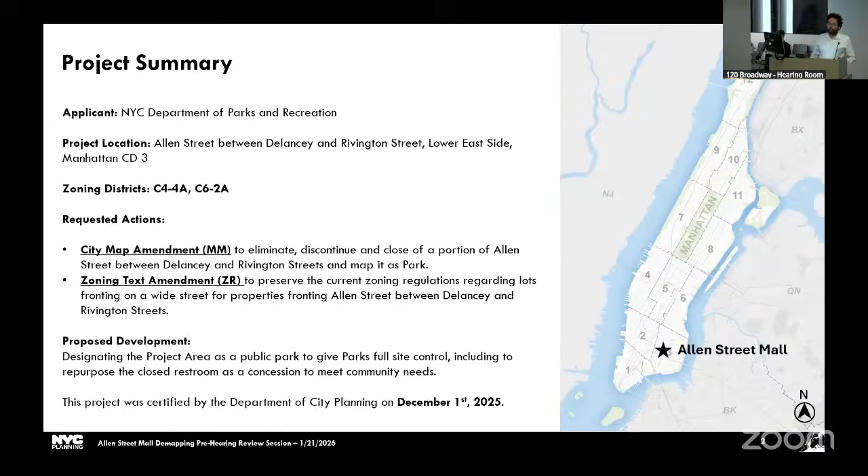The proposed text amendment would allow Allen Street to continue to be considered a wide street for zoning purposes, rather than two parallel narrow streets separated by a park.

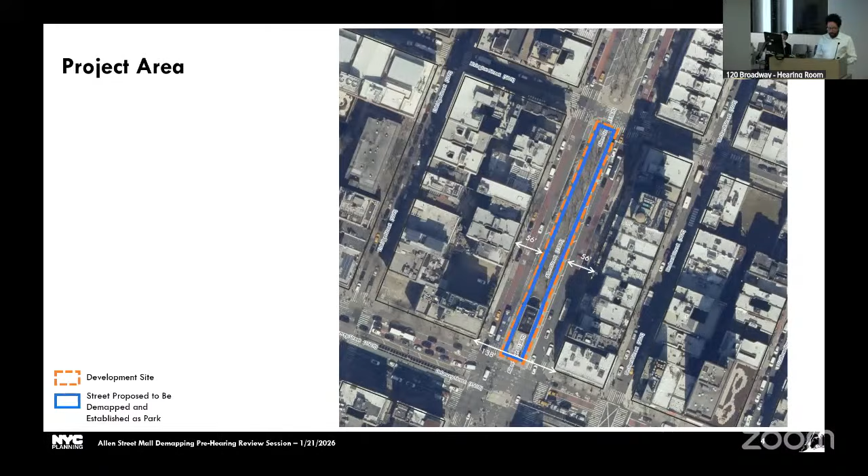So in summary, the Department of Parks and Recreation is seeking a city map amendment to eliminate, discontinue, and close a portion of Allen Street between Delancey and Rivington Streets and map it as Park, and also a zoning text amendment to preserve the current zoning regulations regarding lots fronting a wide street for properties fronting Allen Street between Delancey and Rivington Street. This is in service of designating the project area as a public park to give Parks full site control, including to repurpose the closed restroom as a concession to meet community needs.

Moving into public review, on December 11, 2025, Manhattan Community Board 3 held a public hearing on this project. Then on December 18th, the board issued a favorable recommendation for both actions with 34 in favor, 0 against, and 0 abstaining. Then on January 16th, 2026, the Manhattan Borough President also issued a favorable recommendation for both actions.

So I would like to quickly take a moment to follow up on some of the discussions that happened back at certification. First, there were some questions about bulk regulations. Absent the proposed text amendment, the required minimum setback from the street would increase from the current 10-foot requirement for wide streets to 15 feet for narrow streets.

This would make one lot non-compliant, which is the one highlighted in red. Most of the lots along this corridor appear to be fully built out, but there are 3 lots on the west side of Allen Street that have relatively low FARs built out now, which are the ones highlighted in blue.

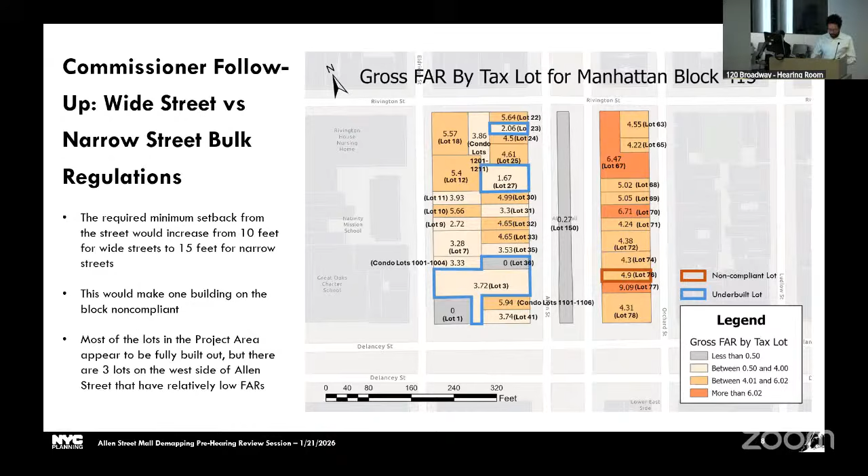Also a note about operational jurisdiction. Parks maintains the malls pursuant to interagency agreement with DOT for all the blocks within the Allen Street Mall. The reason demapping is being sought for this particular block is so that Parks can clarify their authority to administer a concession within that building. It's the one block that has a building on it.

So that's the presentation. Happy to take any questions.

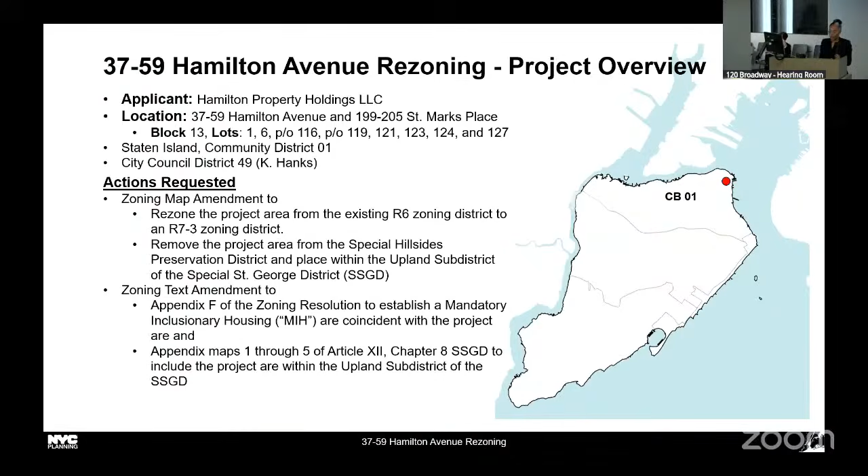These actions are proposed to facilitate the development of an approximately 324,000 square foot, 18-story mixed-use building containing 369 dwelling units, 111 of which would be income restricted, 1,250 square feet of commercial, 7,700 square feet of community use, 3,880 square feet of open space, and 146 parking spaces at 3759 Hamilton Avenue in the St. George neighborhood, Staten Island Community District 1.

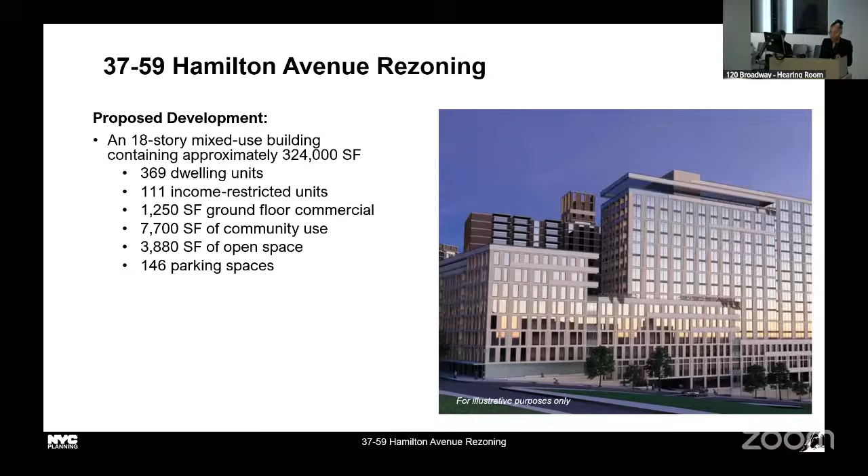This applicant is seeking a zoning map amendment. The project area consists of contiguous lots 1, 6, partial lot 119, 121, 123, 124, and 127 on Staten Island Block 13, which are all under the applicant's ownership and will be demolished for the construction of this project.

In 2021, portions of tax lots 116 and 119 within the development site were removed from the Special Hillsides Preservation District and remapped as part of the Special St. George District, and upzoned from an R6 district with a partial C2-2 overlay to an R7-3 with a C2-4 overlay.

This application was certified by the Commission on November 3rd, 2025, and on December 9th, 2025, the community board voted and issued an unfavorable recommendation. On January 8th, the Staten Island Borough President also issued an unfavorable recommendation, citing concerns that the development would not provide adequate parking and that the scale would further tax an already burdened infrastructure. That concludes my presentation, and I'd be happy to take any questions the Commission may have.

Great, thank you. Another example of a public hearing that is pending, but let's see if there are questions. Commissioner Osorio, thank you Chair. Thanks so much for the presentation. I wanted to ask, can you help us understand what else the department knows in terms of the community concerns?

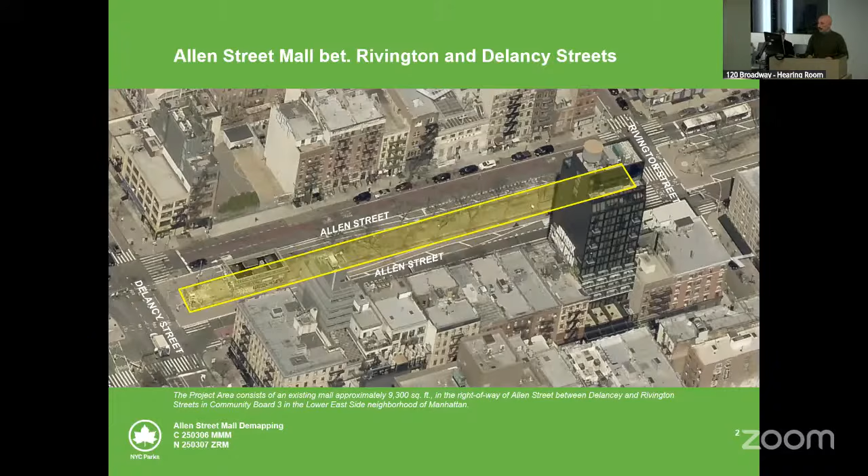As a restroom and some other sort of public amenity. The just-over-1,000-square-foot restroom facility was built in the 1930s by the borough president. It was then transferred to the Parks Department for our maintenance responsibility, just as the other malls on Allen Street were. We had tried once before to discuss this with City DOT regarding activating this site and what that would entail, since it is within their jurisdiction.

It was concluded between both our agencies that the best result for this would be to just demap this and create it as public parkland, so that only the Parks Department and our concession rules would apply for this building and for whatever operation would occupy it.

So the two actions before you are, again, the demapping of Allen Street between Rivington and Delancey. It was decided by DOT and Parks that the best result, in order to have a concession, would be to demap this and map it as parkland. The other action is to specifically designate Allen Street between Delancey and Rivington as a wide street, because after mapping it as parkland, the mall will bifurcate the north and southbound lanes into two narrow streets. This does not affect any of the buildings on that block; we're asking for the definition to be changed to a wide street for this particular block.

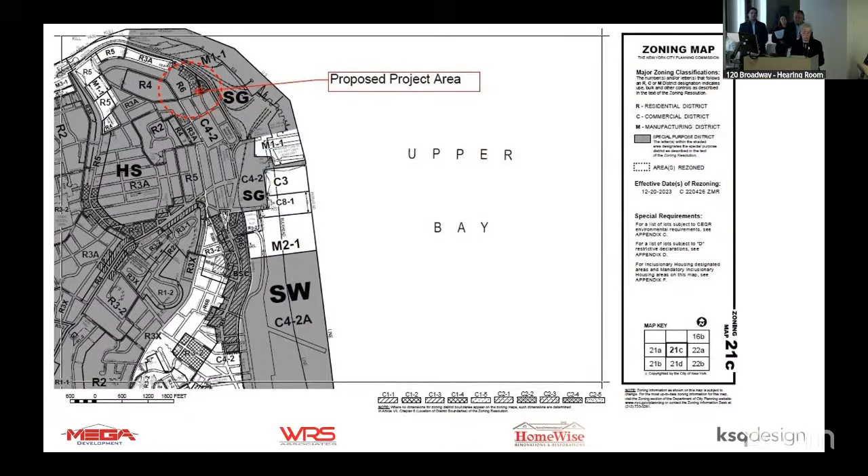Chair Garodnick and Commissioners, good morning. I'm Deirdre Carson of Greenberg Traurig, representing the applicant. I'll present the land use actions we're requesting for the project and the context in which they're proposed. The proposed project is located in Staten Island on the north side of Hamilton Avenue between Stuyvesant Place and St. Mark's Place, in an R6 district within the Special Hillsides Preservation District. The zoning lot has an area of slightly over 53,000 square feet. The applicant seeks 4 actions.

The first is a rezoning of most of the zoning lot from R6 to R7-3 with a small C2-4 overlay. Note that the easternmost part of the site is already rezoned—that was done in 2021. We also seek to remove the property from the Special Hillside Preservation District and place it in the adjacent Special St. George District; amend the St. George text to revise the map of the Upland Subdistrict to include the site; and map an extension of the Staten Island Area 5 MIH District to include our site. The physical context of this is shown in the map here.

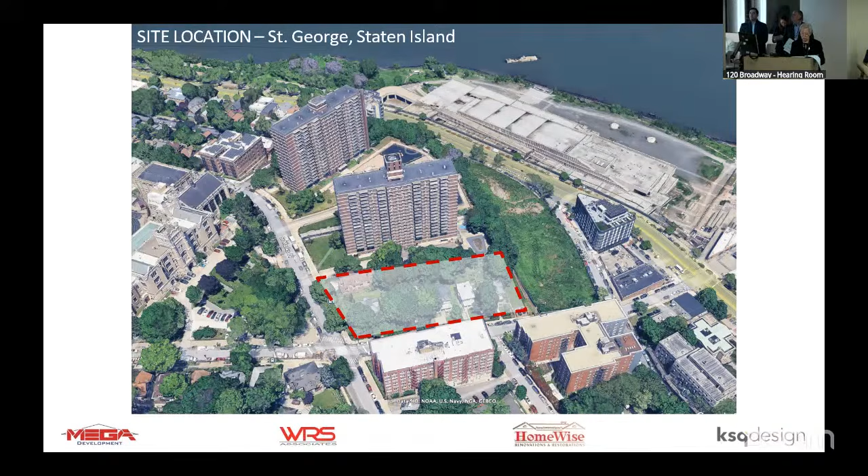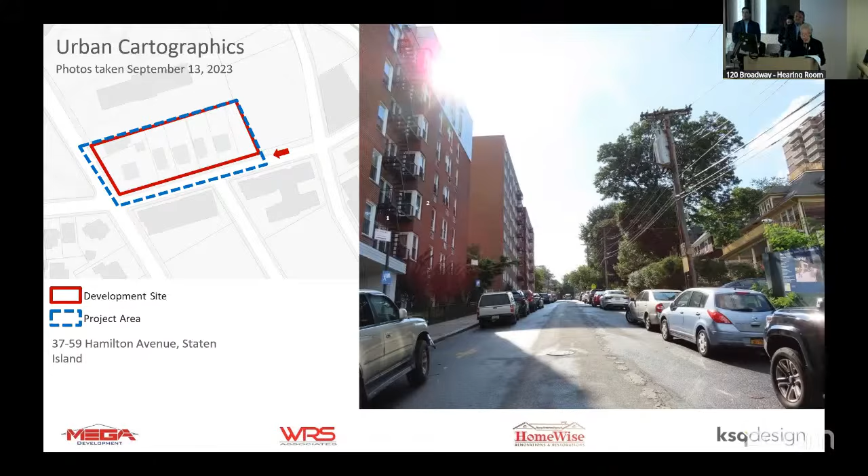The site is highly transit-oriented. Two bus lines stop on St. Mark's Place outside the project's proposed front door. Numerous bus lines run along Richmond Terrace with stops a block from the foot of Hamilton Avenue. These lines lead to and from the St. George Ferry Terminal, as well as the termini of the Staten Island Railway and many of the bus lines that serve the island. The applicant is proposing a new mixed-use building containing up to 369 housing units, retail and community facility use.

146 parking spaces, and a publicly accessible open space. The architect, Armand Quadrini, will now tell you more about the proposed building.

Good morning. I'm Armand Quadrini, Managing Partner at KSQ Architects. As Ms. Carson mentioned, my portion will discuss the building design with specific focus on the deployment of the bulk and the development of the exterior architectural character.

Moving to the site plan, there are purposely various numbers of stories in the proposed development, including 3, 6, 8, 16, and 18-story elements. We purposefully set the street walls back from St. Mark's and Hamilton Avenue as much as possible, so 23 feet offset for St. Mark's and 18 feet 7 inches on Hamilton Avenue. The strategy here is to make as generous as possible walking corridors for safety and also for planting, so we have landscape on both flanks of the building. The 16-story piece is right about in the center of the site. It's 43 feet 10 inches offset from the curb edge of Hamilton, and the 18-story piece is 60 feet set back.

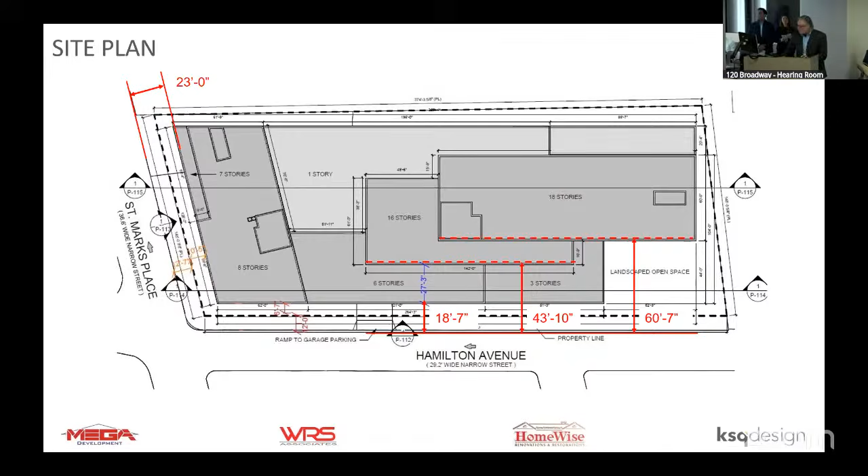The strategy for the deployment of the bulk is very simple. It's to put the highest elements of the proposed development, the 16 and 18-story pieces, adjacent to Castleton Park and to River North, and then the lower scale pieces along St. Mark's and Hamilton.

I'm going to move now to talk about the development of the exterior architectural character. Consistent with our history of work with both Mega and Billy Stein, we really work hard to study the existing architectural language in the neighborhood to make a building that's materiality is very contextual. We went to the Curtis High School, a landmark building. The predominant characteristics of the materiality include buff and sand-colored brick in a blended capacity. There's a lot of patina color green metal, as well as sandstone, or in our case, we'll do a cast stone to bring that forward. So in the proposed development, these are the colors and textures that we borrowed from Curtis. Again, our building will be very modern in its look and feel, but the materiality we think is really important to have it blend with this landmark building that's directly across the street from us.

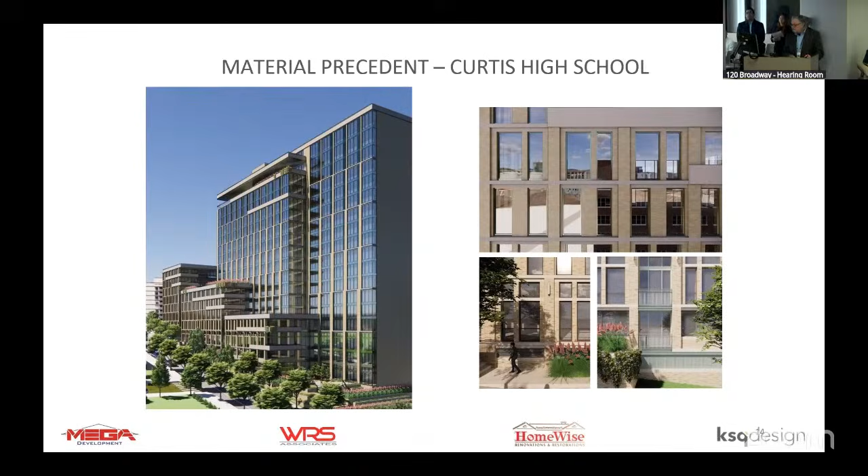You're seeing again the blend of the buff and sand color brick, a strong horizontal datum along St. Mark's. This denotes the community facility use there, and also puts a lid on the pedestrian experience along St. Mark's.

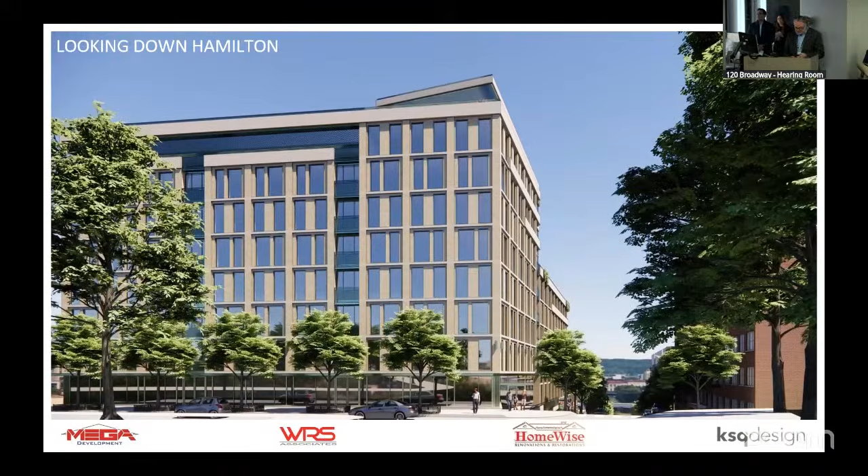Moving down, still at the top of Hamilton, is one of the main entrances to the residential development. You see the angle peels off underneath the street wall and gets access to the main amenity spaces and the front door.

A single access point for the parking garage is very deliberate. This improves safety, so we only have vehicles crossing Hamilton in one location, and we worked hard to make sure we're announcing that crossing.

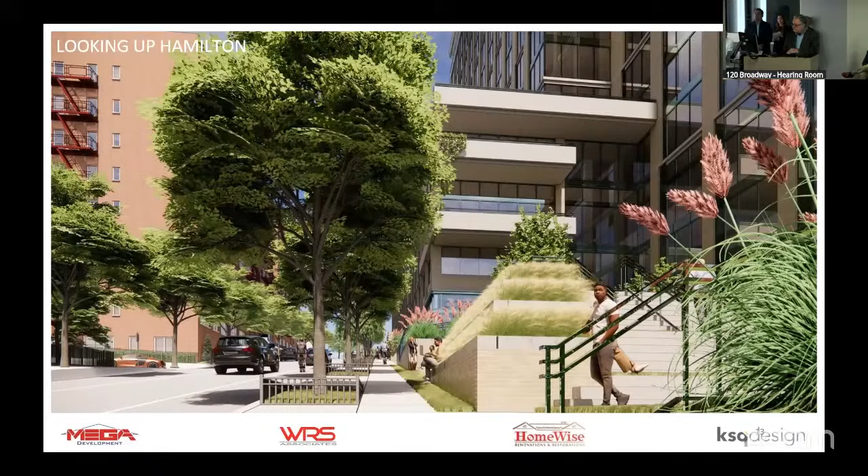I'm super proud of the public open space proposed at the bottom of Hamilton. We think of this as a second entrance to the development for our residents. So if you're in a wheelchair, if you have a stroller, etc., you would be able to come down and exit almost to the bottom of Hamilton near Stuyvesant.

This open public space makes a gesture to River North. We hope they'll have a reciprocal open space, really a true community asset for contemplative and active outdoor space. This has ADA access along Hamilton, again making that connectivity with River North.

Thank you so much. I'm going to turn it over to Mr. Kokonakis.

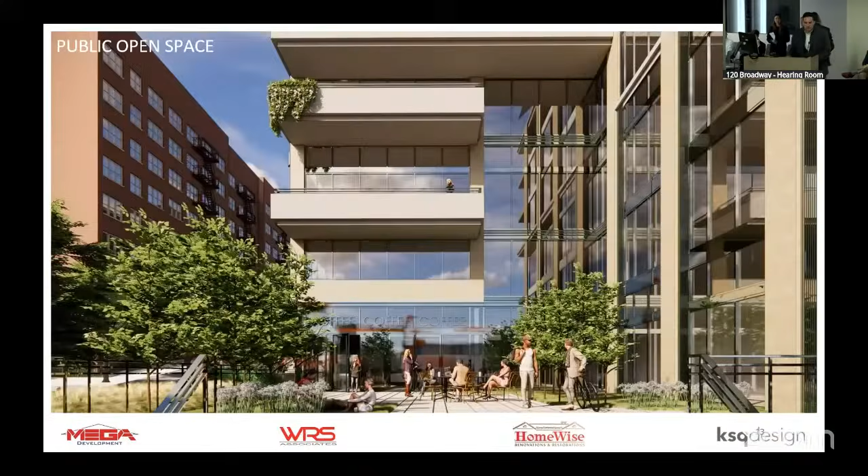Good morning, Chair and Commissioners. Emmanuel Kokonakis with Mega. I'm going to talk through some more programming and economic development aspects of the project here.

To recap quickly, 369 units. We're looking at 111 permanently affordable housing units, under option 2 from an MIH perspective at 30% at 80% AMI. We're going to have some retail and community facility space as well that we look to program with complementary community uses, as well as the open space and the parking.

Here's a quick description of our unit mix. As we previously mentioned throughout, we view this as a highly transit-oriented development, within a 10-minute walk from the Staten Island Ferry. With the expanded services coming online, we're truly excited about the transit-oriented aspects of this development.

So we have a nod to studios and one-bedrooms that we think will complement the transit-orientedness of the project, but also a good number of 2-bedroom and 3-bedroom units, 10% 3-bedrooms to complement growing family needs.

We're going to look to develop this as a Class A type product, highly amenitized, to be competitive with other waterfront communities. We view on-site cafe and working space as a critical component of any new development, as well as both active and passive uses, and capabilities for food delivery in this new age of Amazon and Fresh Direct and the like, as we look for the local community to expand its community services with supermarkets and whatnot as time develops.

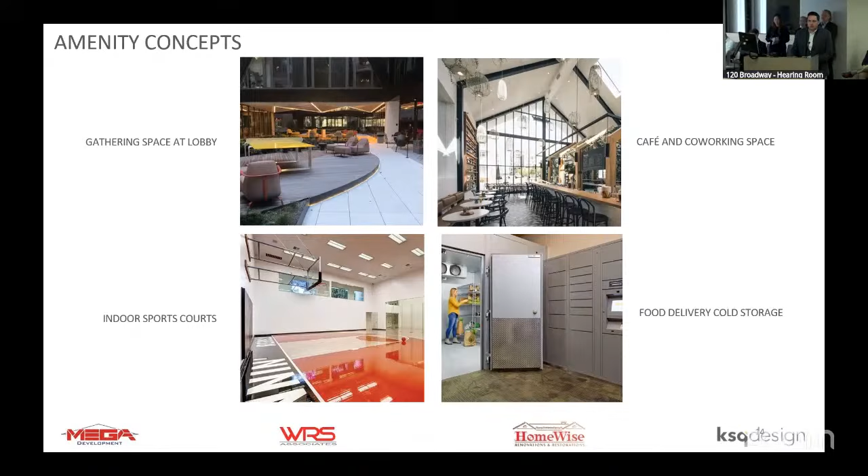We're going to try to achieve as close to carbon neutrality as we can with the project. We are going to be fully electric with no gas on site. We're going to be exploring geothermal feasibility here as well. The rock profile is actually relatively high for this site, which hopefully will be conducive for a nice geothermal system.

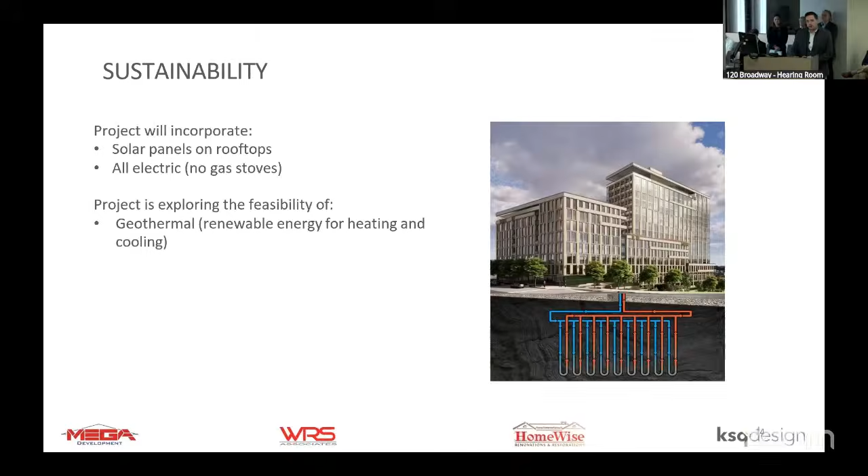Quickly touching on economic development, Mega has a long history and track record of working with HPD on a lot of affordable housing projects, and we're thoroughly well-versed in local recruiting and hiring through Hire NYC, as well as meeting and exceeding MWBE goals on all our projects. Time. Thank you.

That was well done, I must say. Okay, thank you very much for that. Let me see what questions we have.

We're going to start with Commissioner Gold and Commissioner Cerullo.

Hi, thank you. So a couple of questions. First, I'm trying to picture this and know the area pretty well. Are we at the bottom of the hill, or in the middle of that steep hill coming down towards Stuyvesant? Is that the location? So it's right at that corner? We're along the hills. So the precinct is, I'm trying to think, to our east, yes. Is Richmond Terrace right to the east?

Okay, so I guess one of the issues that the community board raised, and I'd say to you is very valid, is they're concerned about infrastructure. But also I think one of the issues with the area, having grown up there, is the lack of supply of food stores, right?

Basics of a neighborhood, right? I'm thinking through, I don't remember there being a dry cleaner. The neighborhood is still really early.

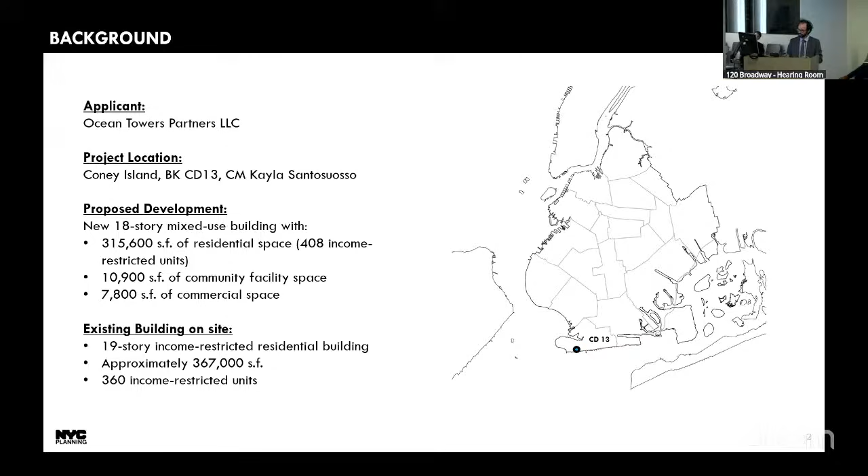The project before you is an application for a zoning map amendment, a zoning text amendment, and two special permits at 2950 West 24th Street. The applicant here is Ocean Towers Partners, LLC. The project is located in Coney Island in Brooklyn Community District 13. The council member is Kayla Santosuosso. The proposal is an 18-story building with approximately 315,600 square feet of residential space for 408 income-restricted units, 10,900 square feet of community facility space, and approximately 7,800 square feet of commercial space. There is an existing 19-story building on the site with 360 income-restricted units that will not be altered as part of this application, so the proposed building will be the second building on the site. The project also includes improvements to open space as well as alterations to the existing parking lot on the site. Here you can see the actions being requested.

The first is a zoning map amendment, which I'll describe in detail later in the presentation. Next, a zoning text amendment to map MIH options 1 and 2 over the project area. Finally, two separate special permits are being requested. The first is a special permit per ZR section 74-743 to establish a large-scale general development, or LSGD, allowing the applicant to waive regulations on height and setback, distribution of bulk, and minimum distances between walls and windows. In addition, a permit per ZR section 74-52 is required to allow the reduction of the required parking for the two buildings from 167 spaces to 143 spaces.

This is an aerial view of the surrounding neighborhood with the project area outlined in blue. The site is comprised of 1 tax lot located in Coney Island, with Seagate to the west and Brighton Beach to the east.

The project area is located just 6 blocks west of the amusement area as designated in the 2009 Coney Island rezoning plan. There are notable open spaces in the area, in addition to the beach and Riegelman Boardwalk, just 1 block south of the project. 1 block to the north is Kaiser Park, a 26-acre park with several athletic fields and courts, as well as fishing areas and public restrooms.

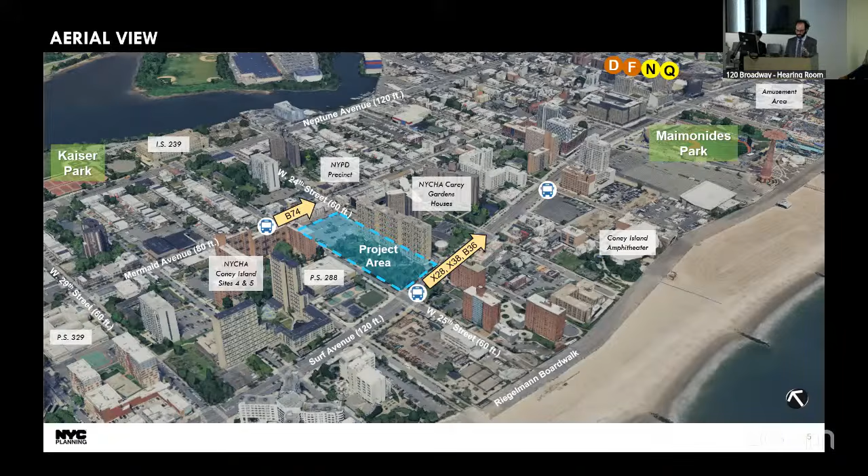Here you can see a land use map of the project area, with the project area and development site outlined in red. The project area encompasses all but the northernmost 100 feet of the subject block, which face Mermaid Avenue. You can see several community facility and institutional uses located to the east and west of the project area.

In the north, you can find a blend of tower and park-style residential developments, as well as 1- and 2-family row houses. To the north of the project area is Mermaid Avenue, an 80-foot wide street with a mix of residential uses, as well as 2- to 4-story mixed buildings with residences above lower-level retail.

The project area and development site are comprised of Lot 13 of Block 7055. The entire project area is currently zoned R6, with the northernmost portion mapped with a C1-2 commercial overlay. R6 districts permit residential uses with a maximum FAR of 2.2, or 3.9 with qualifying affordable housing. A maximum base height of 45 feet is allowed, and a maximum building height of 85 feet is permitted.

R6 zoning districts permit community facility uses at 4.8 FAR. Outside of the greater transit zone, where this project is located, parking is required for 50% of residential units and 25% of income-restricted residential units.

Within a C1-2 overlay, commercial uses are permitted below residential uses at an FAR of 2.0. R5 districts, mapped to the north and south of the project area, allow residential uses at an FAR of 1.5, or 2.0 for qualifying residential sites.

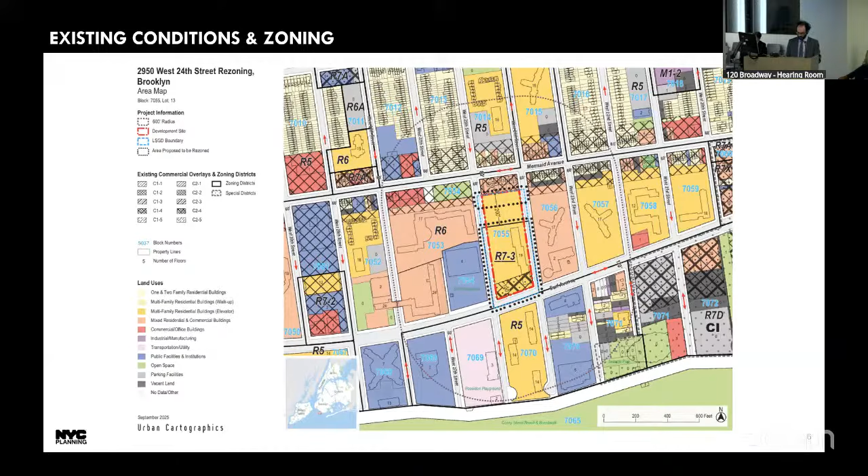Here's an aerial photo of the project area as it exists today, outlined in red. As mentioned, the project area is comprised of Block 7055, Lot 13. It was constructed in 1972 and exited the Mitchell-Lama program in 2006, but has been regulated under a new agreement with HPD since 2013.

Here you can see in blue the existing building on the lot, a 19-story residential building with 360 income-restricted units, which would not be altered as a part of this project. It contains a mix of studio to 5-bedroom units, with about 70% of units containing 2 or more bedrooms.

At the northern portion of the project area is an existing parking lot for the development, outlined in yellow, which includes 160 parking spaces, although only 117 spaces are required for the use per certificate of occupancy, and I'll touch upon that a little bit more in a bit.

Finally, you can see the general location of the proposed building and the existing open space at the top of your screen. The open space today is landscaped, but generally inaccessible, surrounded by gates.

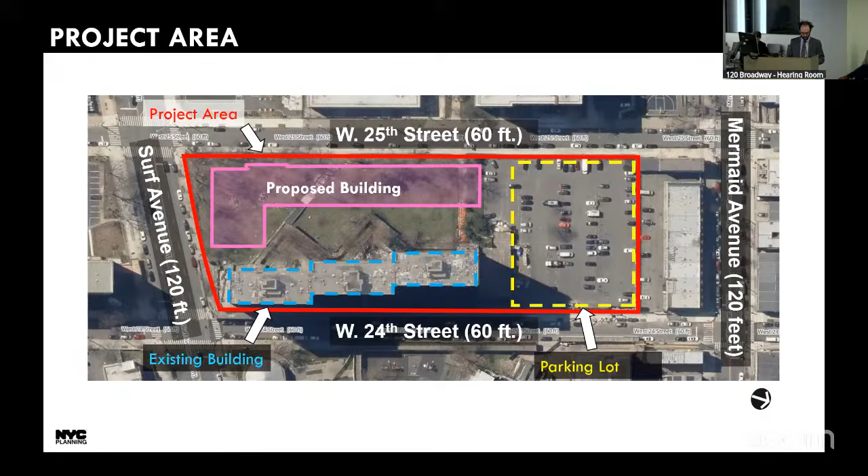I'd like to show a few images of the site as it exists today. Here you can see an image of the existing 19-story residential building on the site, facing northwest from West 24th Street. This is an image of the subject property from West 24th Street, facing southwest. In the foreground, beyond the black fence, is the existing 160-space parking lot, and at the left side of the screen is the existing 19-story building on the lot. Here's an image of the subject property from West 24th Street facing south, and you can see the existing building in the image on the right side of the screen.

This shows the project area from West 25th Street facing southeast. In the foreground here is the parking lot beyond the fence, and the existing building on the site is seen in the middle of the image. In the background to the left is Building 1 of the NYCHA Carey Gardens houses, located across West 24th Street from the project area.

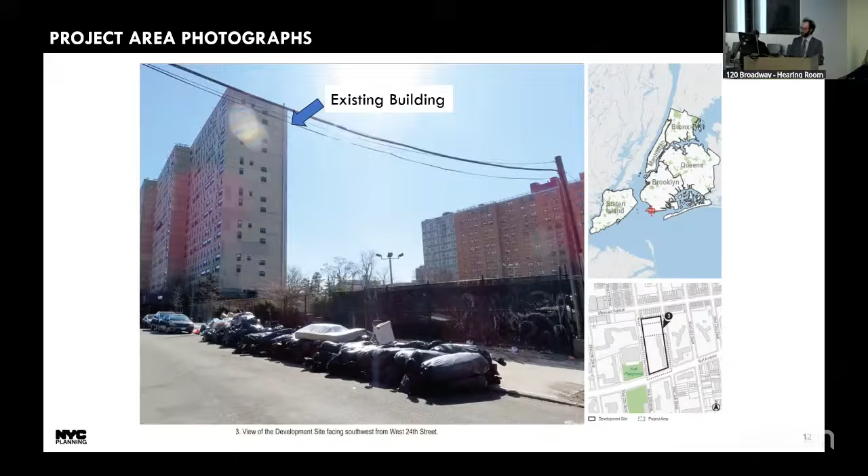This is an image of the project area facing southwest from West 24th Street. In the background is the existing building, but in the foreground is the existing open space on the site, upon which the new building is to be constructed along West 25th Street. And this is an image of the project area facing northeast from the intersection of West 25th Street and Surf Avenue. Again, the proposed building is to be located on the existing open space in the foreground of the image here.

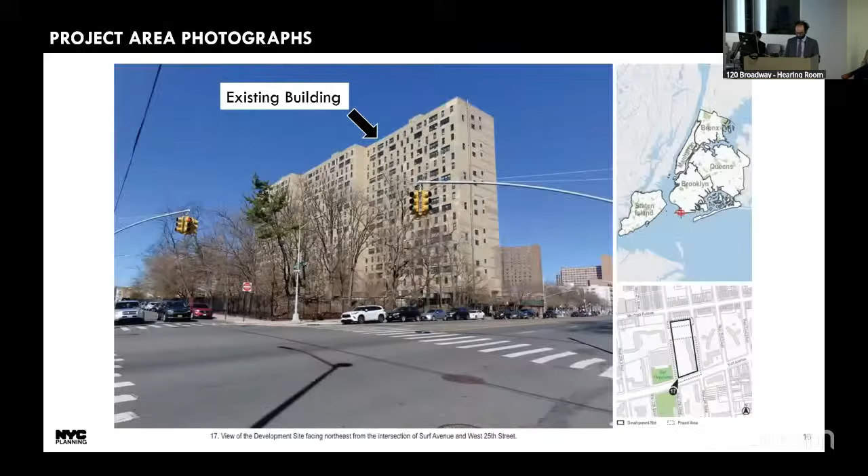The proposed development is an 18-story, approximately 334,000 square foot mixed-use building with 408 income-restricted residential units and 2 superintendent's units. The income-restricted units are to be developed pursuant to HPD's Extremely Low to Low Income Affordability Program, or ELLA. The project also includes approximately 11,000 square feet of community facility space and approximately 8,000 square feet of commercial space. As noted, the proposal will also include the reduction of the parking lot requirement from 160 spaces to 143 spaces.

If the project is approved, the full site will have 701,460 square feet of floor area with 770 total income-restricted units. This project also includes the refurbishment of many of the open spaces on the site, both internally and along the periphery of the site.

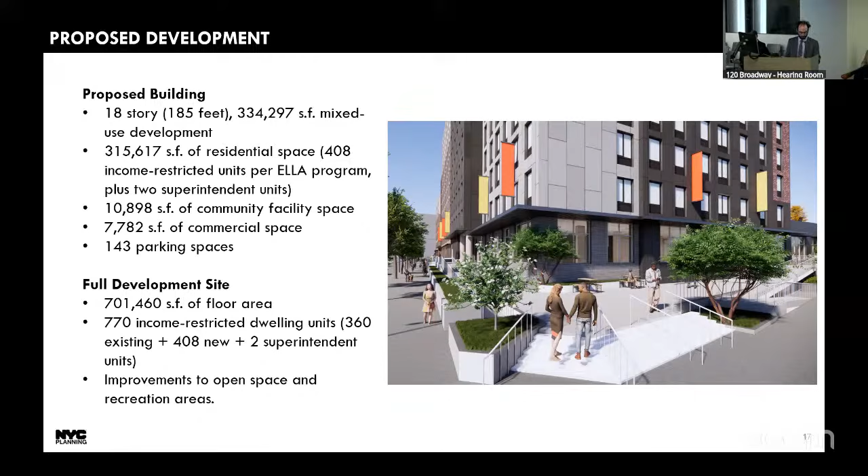As noted, the applicants are proposing several improvements to the site. Here you can see an open space plan of the existing and proposed buildings, with the proposed building at the top of the screen and the existing at the bottom. The open space between the two buildings is to include 2 playgrounds shown here in orange, as well as a series of different seating types along the walkways. A larger multi-purpose field and fitness area is to be located at the northern side of the open space between the 2 buildings.

A new entry plaza with additional greenery and ornamental trees is proposed at the intersection of Surf Avenue and West 25th Street. Along West 25th Street and Surf Avenue, at the top left corner of the screen here, additional seating and foliage are proposed to enliven and activate the street.

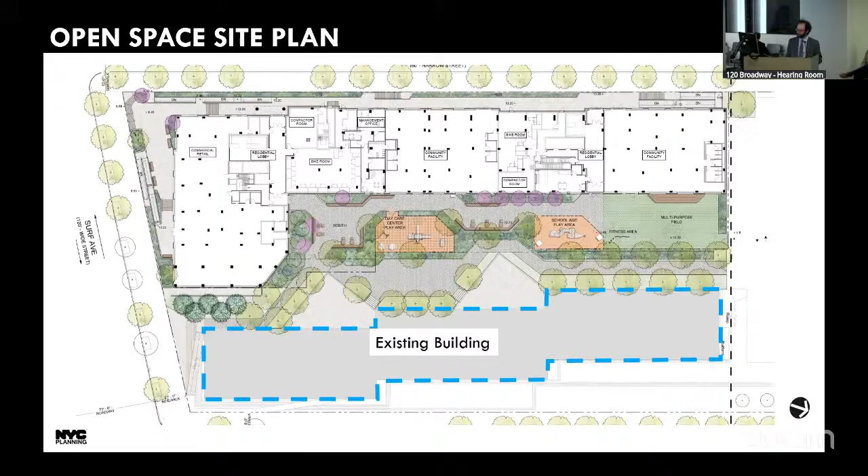As the project is located within the flood zone, I wanted to discuss the resiliency features of both the existing and proposed building, as the applicants have informed us of these elements. The existing building's lobby was flooded 4 feet during Hurricane Sandy, and as a result, management upgraded and replaced several elements, including elevators, boilers, heating pipes, and windows. In addition, 2 mechanical rooms were constructed above the flooding area.

In the proposed building, the applicant is raising the building to the design flood elevation, or DFE, which is equal to the base flood elevation plus a safety margin for future risk, adding additional protection. The basement is to be dry flood proofed. Additionally, the building is to be compliant with HPD guidelines to meet standards based on 2080 sea level rise calculations.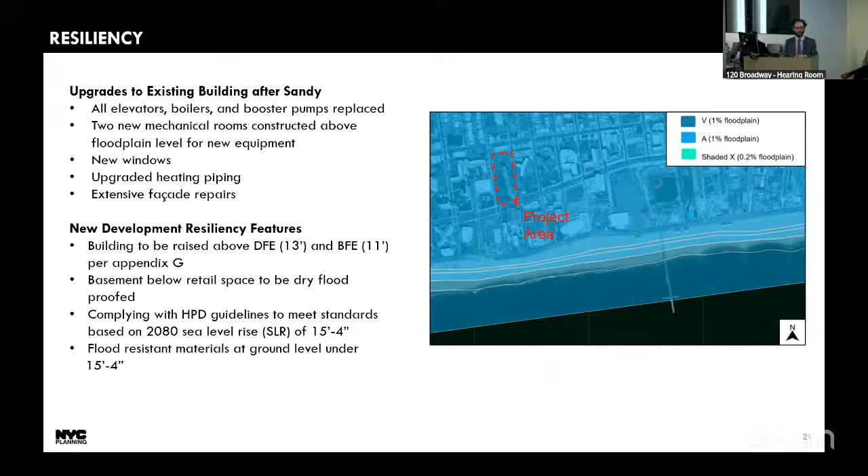As noted, 4 actions are being requested of the CPC today. The first is a zoning map amendment, which can be summarized in 3 parts. The entirety of the project area is mapped R6 right now, and a portion of that R6 district will be rezoned to R7-3. That's part 1. A C2-4 commercial overlay is to be mapped over a portion of the R7-3 district along Surf Avenue. And finally, the depth of the existing C1-2 overlay mapped along Mermaid Avenue to the north will be reduced from 150 feet to 100 feet.

Next, the applicant is requesting a zoning text amendment to map MIH options 1 and 2 over the project area. Finally, the applicant requests 2 CPC special permits. The first is a special permit to establish an LSGD, permitting the applicant to modify regulations on height and setback, distribution of bulk, and minimum distance between walls and windows. The applicant is requesting a second special permit to reduce the required parking at the site from 167 spaces to 143 spaces.

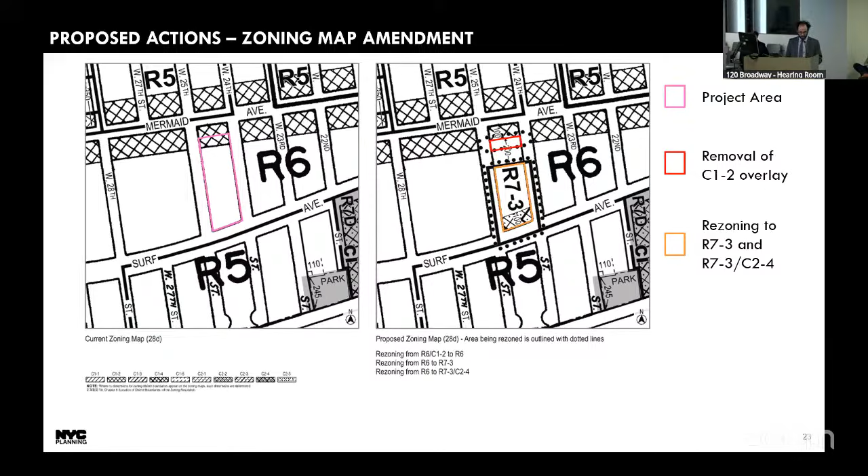Regarding parking, the project area is outside of the greater transit zone. Just as is the case with the existing R6 districts, buildings in R7-3 districts must provide parking for 50% of dwelling units. However, that requirement is only 12% for income-restricted dwelling units, and all parking may be waived if under 15 spaces are determined to be required.

The applicant also seeks to amend Appendix F of the zoning resolution to designate the project area as a mandatory inclusionary housing, or MIH, area with options 1 and 2. Option 1 requires that affordable housing be set aside at 25% of the residential floor area at an average of 60% of the area median income. Within that 25%, at least 10% at 40% AMI is required. Option 2 requires that 30% of the residential floor area of the building be affordable to households at an average of 80% AMI. While the applicant technically intends to choose option 1, ensuring approximately 102 units are permanently income restricted, they intend to exceed these minimum requirements by providing all units as income restricted per HPD's Extremely Low and Low Affordability Program, or ELLA program.

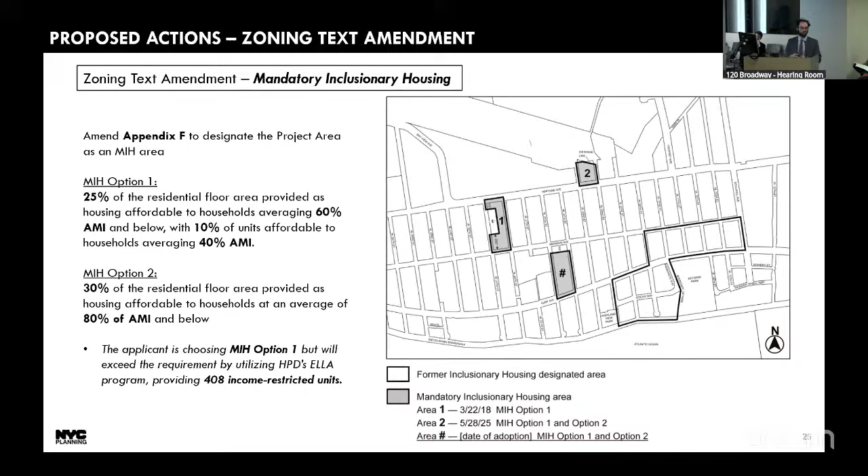2 special permits are being requested with the application. The first special permit requested is for an LSGD. The LSGD will allow the applicant to construct the building with waivers related to height and setback, distribution of bulk, and minimum distances between walls and windows. I'll elaborate upon each of these further in the next few slides.

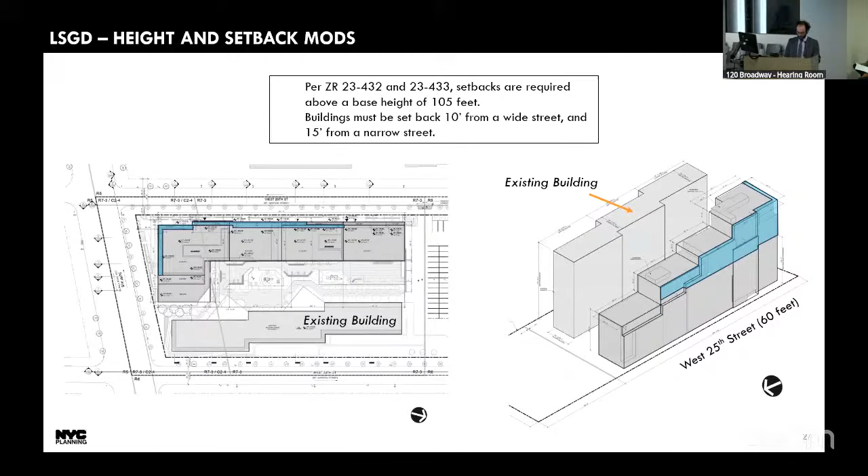Additionally, the applicant is requesting permission to redistribute residential floor area from the R6 portion of the lot to the R7-3 portion. As noted, the area of the tax lot occupied by the parking lot will remain zoned R6. So the applicant is requesting that the permitted bulk in that area, which will be unused as it's a parking lot, be transferred to the remainder of the zoning lot. The R7-3 district permits a maximum FAR of 6.0 and a maximum community facility FAR of 6.5, as previously discussed. But with this waiver, the total built FAR within the R7-3 portion of the lot is to be 7.35, and the total built FAR within the R7-3 C2-4 portion of the lot is to be 6.16.

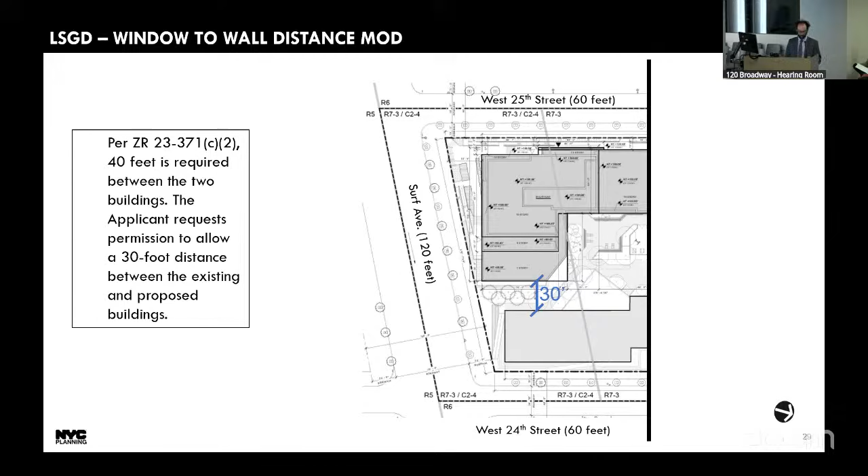An additional special permit is requested related to parking. While the site currently has 160 spaces, only 117 spaces are required per an existing certificate of occupancy. The new building would require 50 spaces. Adding those requirements together, 167 total spaces are to be required for the full development after construction. The applicant is seeking a special permit per ZR section 7452 to allow a waiver of this requirement so they can construct 143 spaces rather than the required 167. To approve the special permit request, the CPC must find that the reduction won't impede access to existing parking on adjoining lots and won't have undue adverse impacts on residences, businesses, or community facilities in the area. The CPC is permitted to prescribe appropriate conditions to minimize impacts on the character of the neighborhood.

This completes the summary of actions being requested for the project.

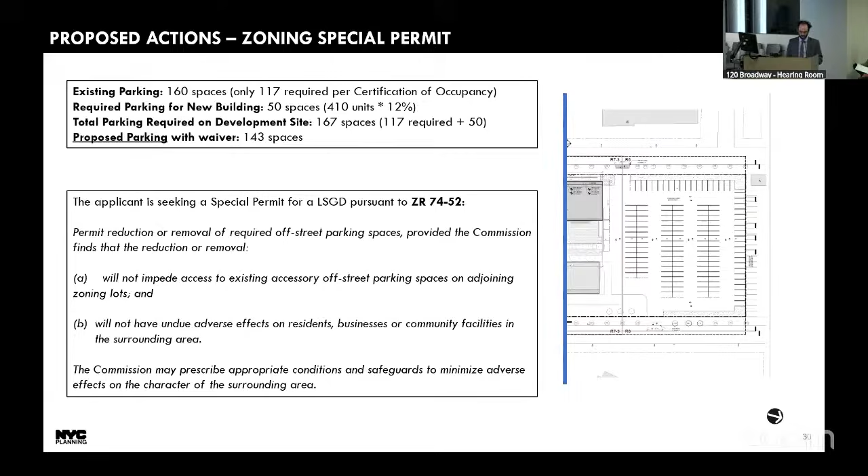This project requires a racial equity report pursuant to Local Law 78. While the area is designated as having a lower displacement risk, the annual median household income in the area is approximately $47,000, which is considerably lower than Brooklyn and New York City as a whole. The applicant has stated that the proposal would produce 408 income-restricted units from a range of 27% of AMI to 77% of AMI. Nearly 60% of units would be designated as income-restricted to individuals earning no more than 57% of AMI.

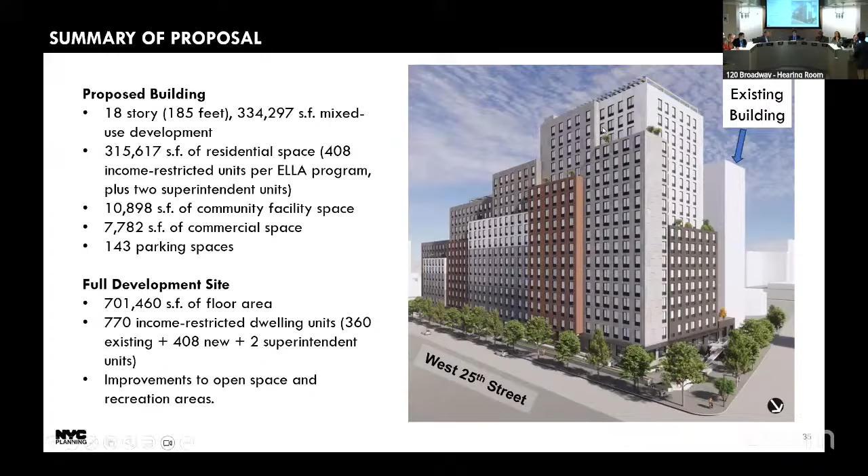Great presentation, but I was hoping to get more understanding of the relationship between the Mitchell-Lama part of the project and this new part. You suggested that the upgrades in the Mitchell-Lama part of the project had already been completed.

Correct. But I thought I read that part of the money from this project was going to fund those upgrades. Yeah, so there will be additional upgrades that the applicant has told us about, and I'll allow them to elaborate more, but our understanding is that many of the upgrades were due as a result of Hurricane Sandy years ago. However, they plan to have additional upgrades for the building that were perhaps not as urgent in terms of resiliency after Hurricane Sandy, that are to be applied after this project is completed.

Can we get a list of those? Because some of them seem to be the same as what you were talking about. It said they would be paying for upgrades to existing elevators or new elevators, boilers and booster pumps, two new mechanical rooms above the floodplain, new windows, upgrading heating pipes, and facade repairs. So I'd like a list of the ones that have already been done and the ones proposed to be funded from the sale or lease of the excess land.

Well, I do want to clarify regarding Mitchell-Lama that it's currently not regulated by Mitchell-Lama today. Right, so they're out of the Mitchell-Lama program. I understand that, but it's easier to just clarify this.

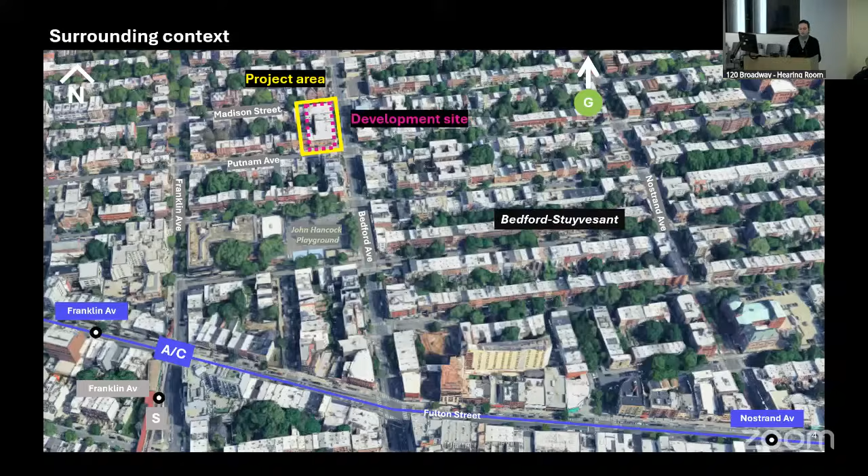The project area is currently zoned R6A C24, which allows for buildings including qualifying affordable housing to reach a maximum height of 95 feet with a maximum base height of 65 feet and a maximum residential FAR of 3.9. Parking is not required for residential uses in the inner transit zone and is waived for non-residential uses when located in mixed buildings. The commercial overlay allows for local retail.

This project area's R6A zoning was established as part of the 2007 Bedford-Stuyvesant rezoning. That rezoning aimed to preserve neighborhood character while also supporting housing growth and affordable housing along appropriate corridors such as Fulton Street, which was mapped within an R7D district as part of that rezoning.

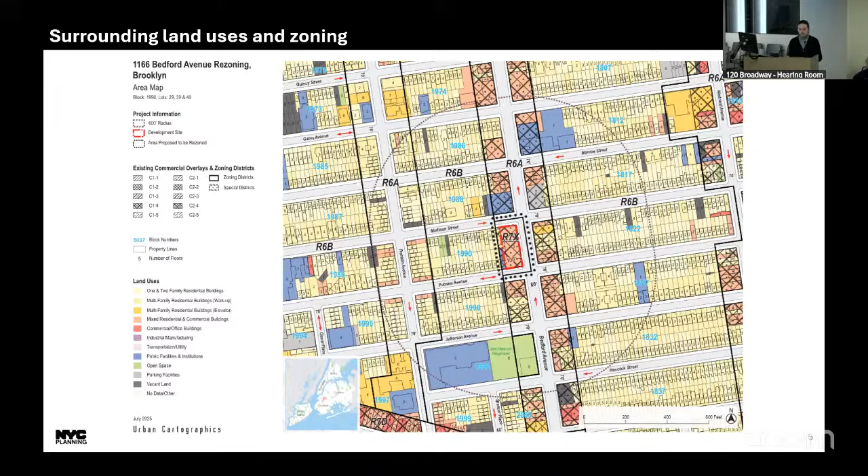The building's 2nd and 3rd floor and a part of the 1st floor are dedicated to the Masjid Abdul Muhsi Khalifah and the Clara Muhammed School of Masjid Khalifah, both of which will continue to occupy the proposed development. The rest of the 1st floor has neighborhood commercial uses, including restaurants, office space, and a home improvement store.

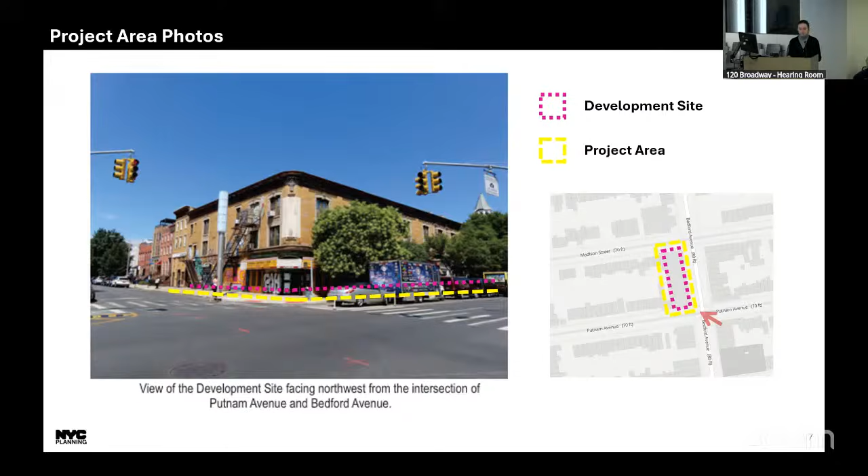The applicant is proposing a 12-story, 93,837 square foot building. This would include 75,602 square feet of residential, consisting of 144 units of income-restricted senior housing. This building would also include 13,412 square feet of community facility space, including the Masjid Abdul Muhsi Khalifah and the Clara Muhammed School, currently located on the development site. The remaining 4,823 square feet would be ground floor commercial space.

The building would rise to a height of 95 feet before setting back and continuing to rise to a total height of 125 feet. Along Madison Street, which is visible on the right-hand side of this rendering, the proposed development would set back after 45 feet. No off-street parking spaces would be provided.

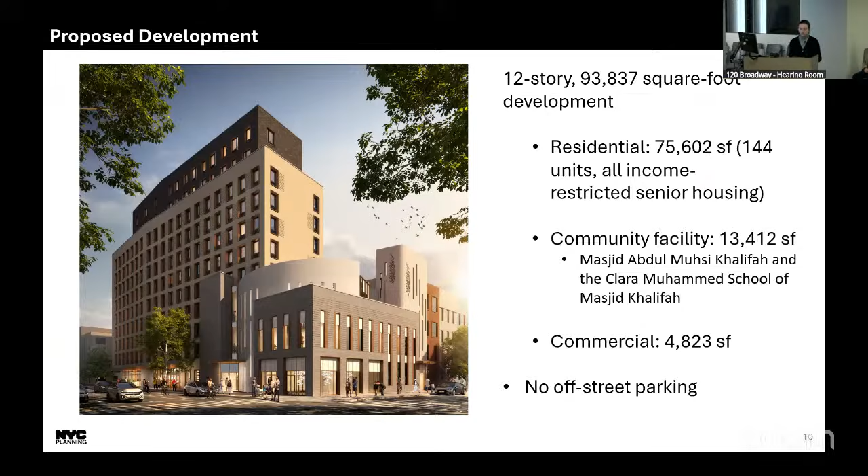To facilitate this development, the applicant is requesting a zoning map amendment to change the existing R6A C24 district along the west side of Bedford Avenue between Madison Street and Putnam Avenue to an R7X C24 district.

The proposed zoning district of R7X is a contextual medium-density residential zoning district that permits 6 FAR of residential uses for qualifying affordable housing. The maximum community facility FAR in this district is 5. The maximum height for buildings containing qualifying affordable housing in R7X districts is 145 feet, with a maximum base height of 105 feet.

The C24 commercial overlay would remain in place, continuing to allow neighborhood commercial uses like local retail and restaurants. This development site is in the inner transit zone, meaning off-street parking is not required for residential uses, and non-residential parking requirements are waived in mixed buildings.

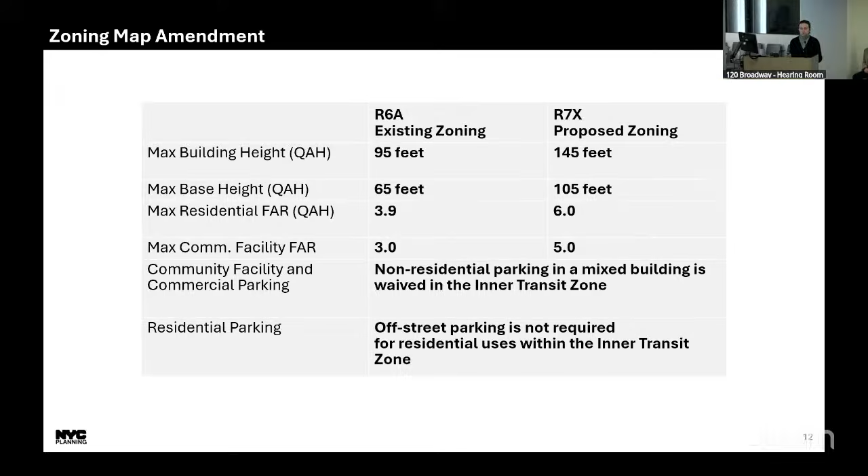In addition to the zoning map amendment, the applicant is requesting a zoning text amendment to amend Appendix F and establish an MIH area with options 1 and 2. The proposed MIH area can be seen at the top of this map.

MIH option 1 requires that 25% of residential floor area be affordable at 60% AMI. MIH option 2 requires that 30% of residential floor area be affordable at 80% AMI.

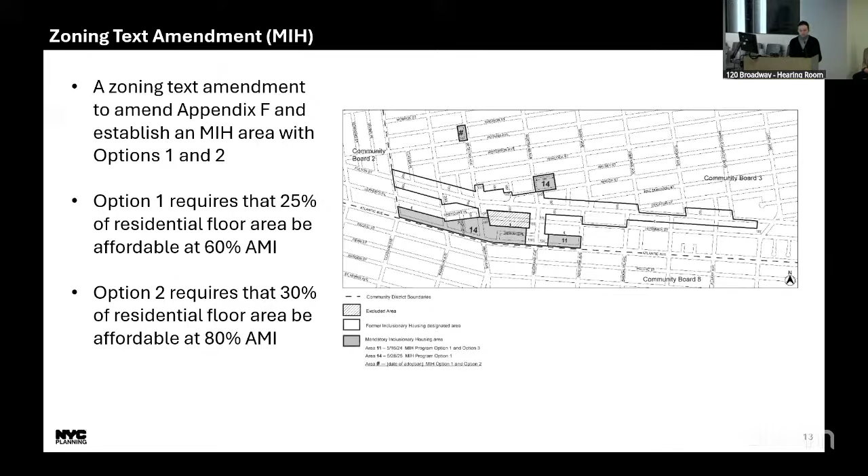So in conclusion, Khalifa Residences LLC is requesting a zoning map amendment to change an R6A C24 district to an R7X C24 district, and a zoning text amendment to establish an MIH area. These actions would facilitate a new 12-story development with 144 units of income-restricted senior housing, as well as community facility and commercial space. Thanks so much.

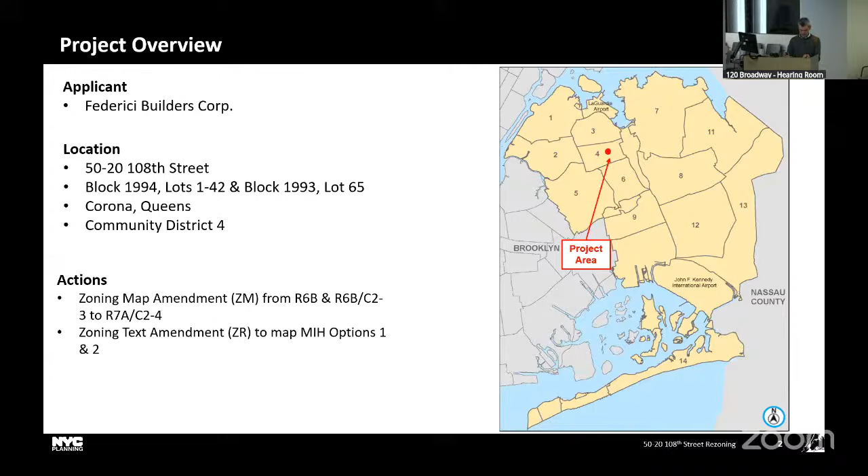These actions would facilitate the development of 2 mixed-use buildings with approximately 216,400 total square feet, containing 196 total dwelling units, of which 49 would be income restricted, 15,300 square feet of commercial space, 16,600 square feet of community facility space, and 68 total accessory parking spaces.

Here is an aerial view looking at the Corona neighborhood and surrounding areas. The project area is located between 108th Street and Corona Avenue, both wide streets. 108th Street is a major north-south corridor running to the center of Corona. The project area is located less than a half mile from Flushing Meadows, containing attractions such as the New York Hall of Science, Queens Museum, and Queens Zoo. The surrounding area is served by a number of elementary, intermediate, and high schools.

This proposal is also located within the outer transit zone. 108th Street is served by the Q23 bus, while Corona Avenue is served by the Q58. The nearest subway station is at 103rd Street Corona Plaza, along the 7 train on Roosevelt Avenue, approximately 7 or 8 blocks to the north.

As seen here, the immediate surrounding area is characterized by a mix of land uses, including residential, commercial, and community facility uses, with commercial uses concentrated along 108th Street and Corona Avenue, where commercial overlays are also mapped. The surrounding areas are primarily residential, in line with the underlying residential districts.

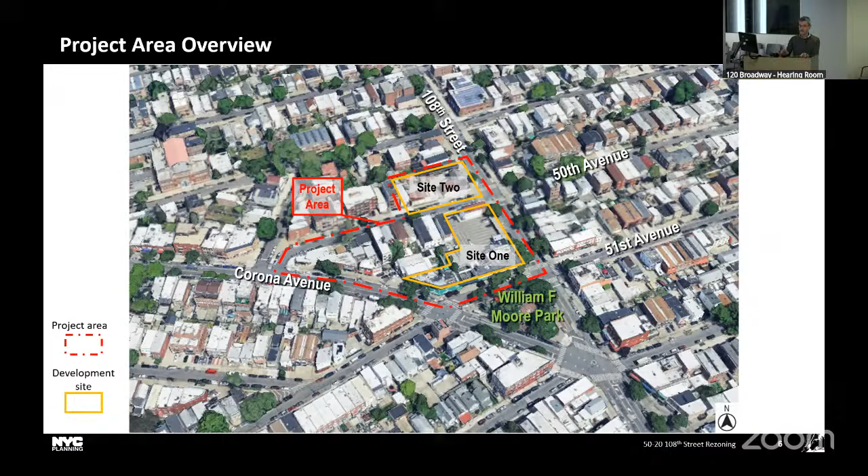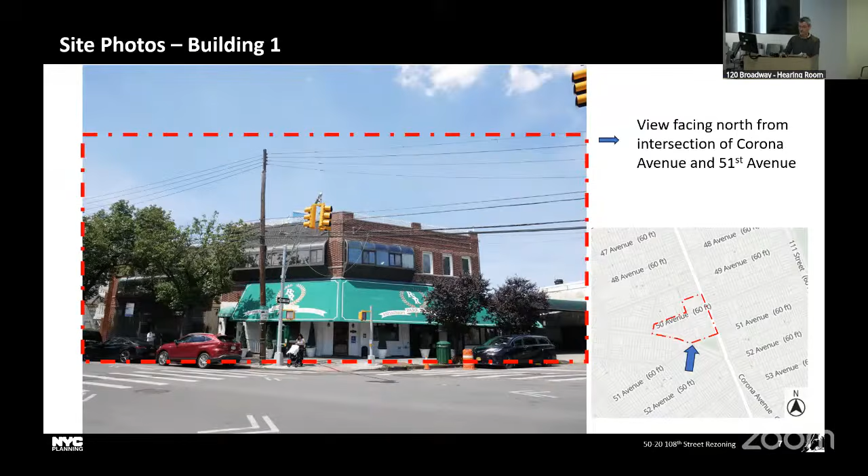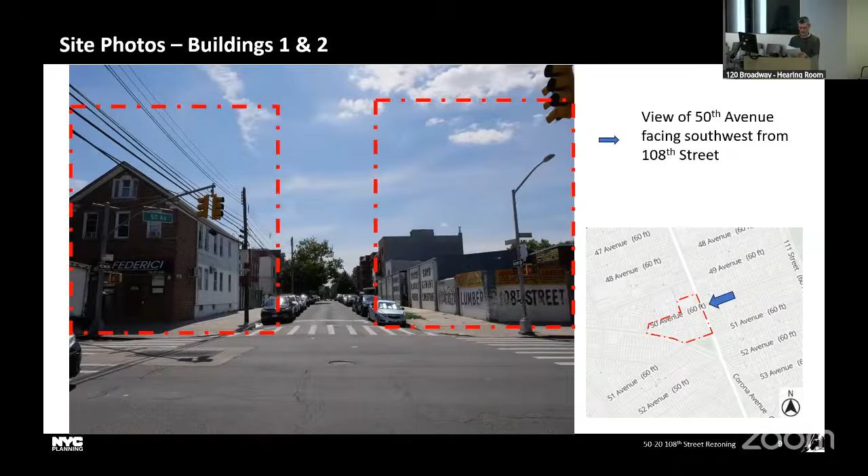The proposed rezoning would facilitate the development of 2 new buildings containing 196 total dwelling units, of which 49 would be income restricted, 15,300 square feet of commercial space, 16,600 square feet of community facility space, and 68 total accessory parking spaces.

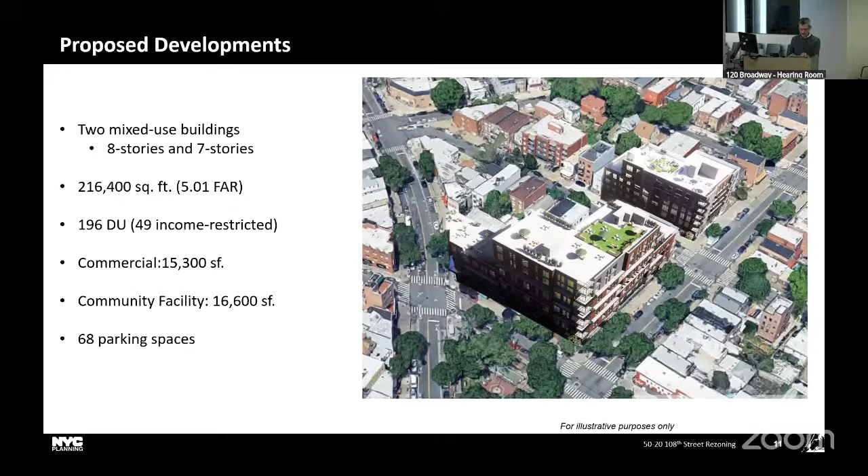Building 1 would be built at 5020 108th Street with 8 stories and a total building height of 85 feet, and would contain 141,200 total square feet out of a max FAR of 5.01. The building would contain 122 dwelling units, of which 31 would be income restricted, with 15,300 square feet of commercial space and 6,400 square feet of community facility space, and 44 accessory parking spaces situated in the cellar.

Here you can see the commercial entrance. The residential entrance would be situated along 108th Street, as well as an entrance to the community facility space. A parking entrance to the cellar would be situated along 50th Avenue, where a new curb cut would be made, and commercial entrances would be situated along 51st Avenue as well as Corona Avenue.

Building 2 would be a 7-story building with a max building height of 75 feet, containing 75,200 total square feet, with 74 dwelling units, of which 18 would be income restricted, 10,200 square feet of community facility space, and 24 accessory parking spaces.

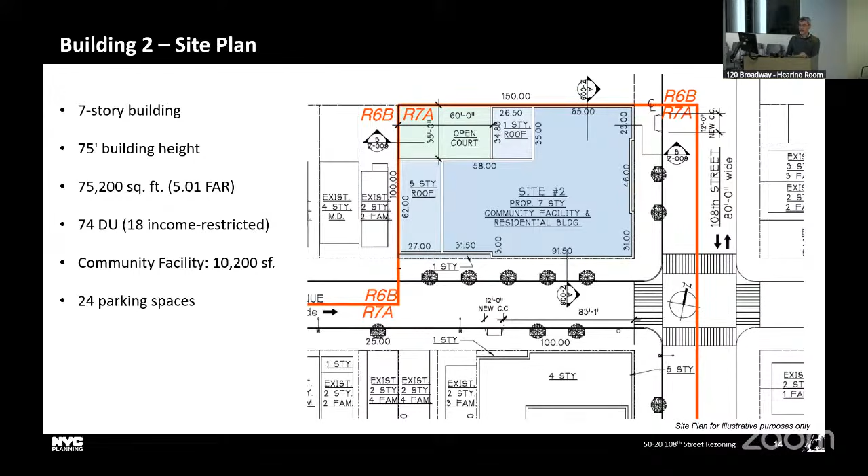Those parking spaces would also be located in the cellar, accessible via a new curb cut along 108th Street. Entrance to the residential and community facility portions of the building would also be accessible from 108th Street.

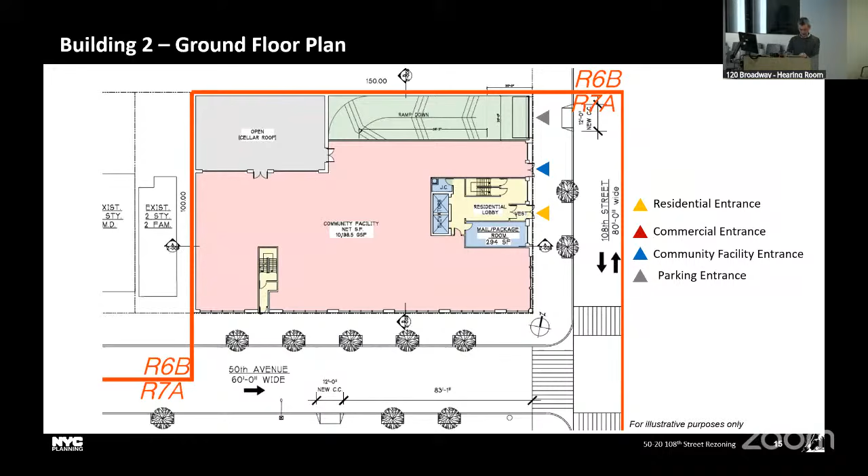So to facilitate this proposed development, the applicant proposes a zoning map amendment from existing R6B and R6B/C2-3 zoning districts to an R7A/C2-4 zoning district, and a zoning text amendment to map MIH options 1 and 2.

The applicant is also seeking to map both options 1 and 2 for mandatory inclusionary housing. Option 1 requires 25% of residential floor area be income restricted at an average of 60% AMI, while option 2 requires that 30% of residential floor area be income restricted at an average of 80% AMI. In this case, the applicant is proposing to utilize option 1 in both new buildings.

This application is subject to a racial equity report requirement since it seeks approval for an increase in permitted floor area of at least 50,000 square feet. The median household income in Community District 4 was approximately $59,400 annually, which is less than estimates for Queens and New York City at $70,900 and $67,100 respectively.

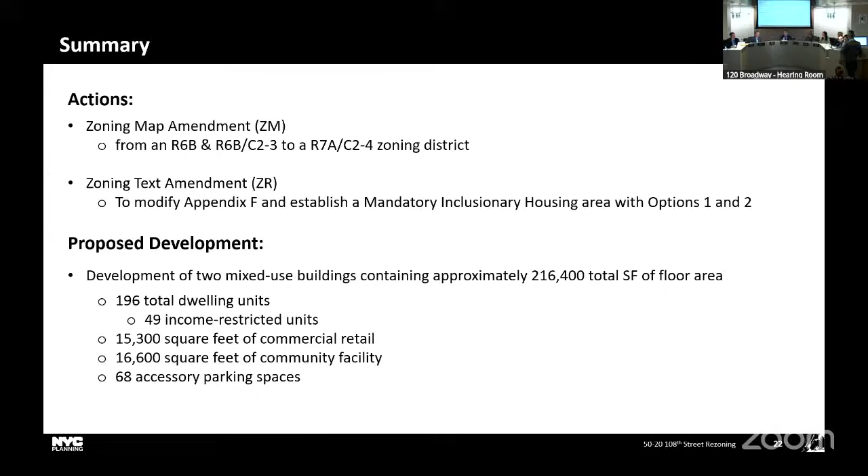Commissioner Osorio: Thank you, Chair. Thanks for the presentation. I just wanted to make a quick comment. From the racial equity report, it's also very important to highlight that this has one of the highest risks for displacement. So I would love to hear a little bit more in terms of how MIH option 1 really works out regarding the need for deeper affordability. Something I would love to hear more about when this comes back to us.

Sure, thank you for the comment. Yeah, thanks so much. Thanks, Commissioner.

Okay, well, Commissioner Osorio, sorry about that. Yes, and if you can, when we see it again, say a little bit more about what the plan is for the renovations for William F. Moore Park, that would be great. Okay, sure, thanks. Okay, thank you.

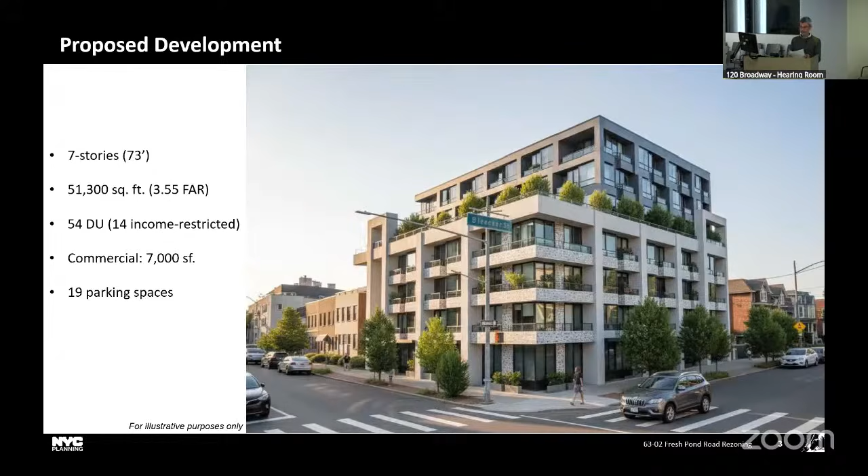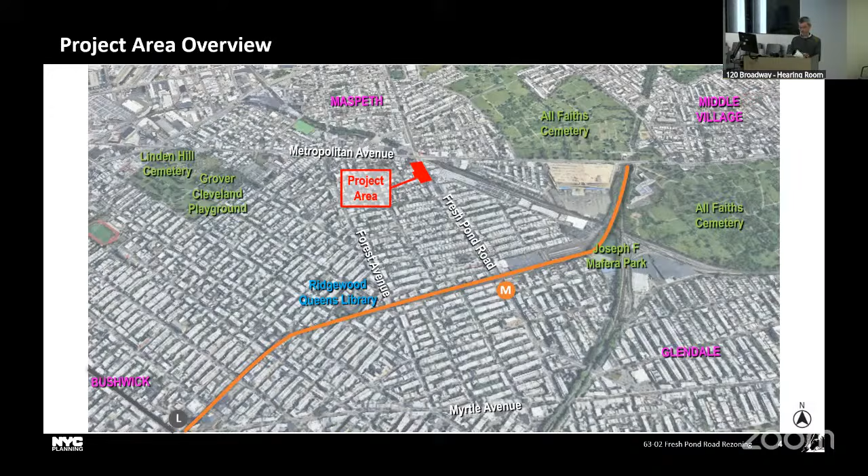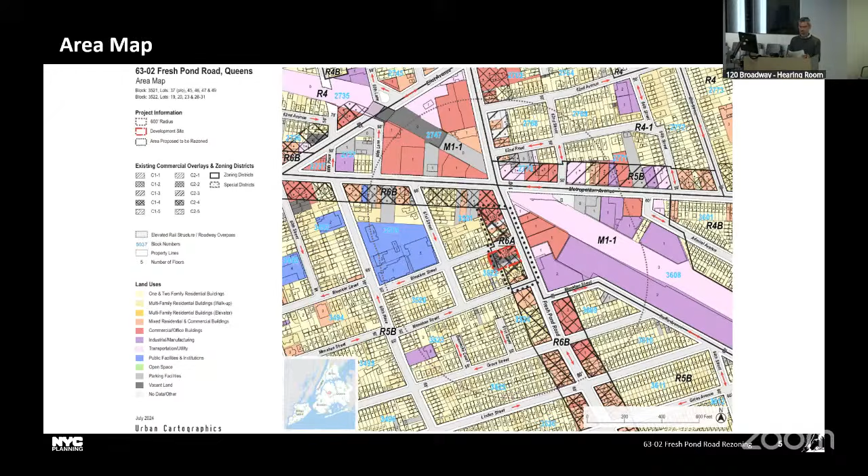Now zooming in closer to the project area, with the project area outlined in red and development site outlined in yellow, which is applicant-owned and currently a vacant lot. The non-applicant-owned lots within the project area are primarily improved with 2- and 3-story mixed-use buildings with ground floor commercial and residential uses on the upper floors, as well as a drive-through TD Bank.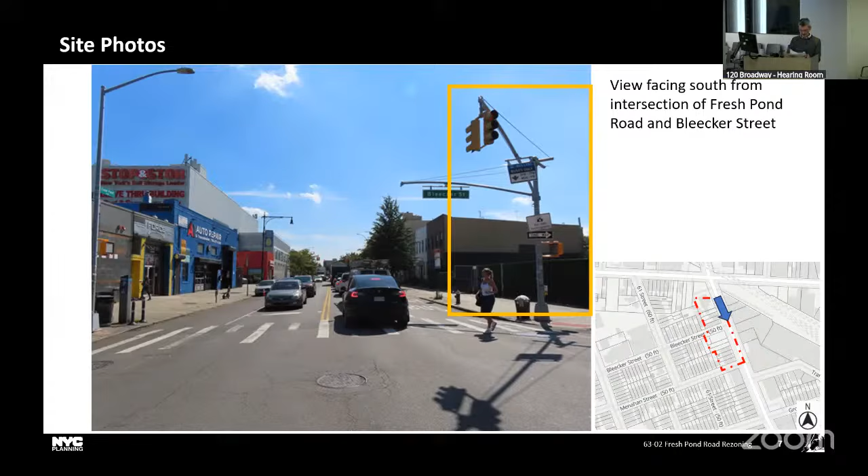This is a view facing south from the intersection of Bleecker and Fresh Pond Road, looking at Fresh Pond Road with the proposed development outlined in yellow on the right. Here's a view facing west from the same intersection of Fresh Pond Road and Bleecker, looking toward Bleecker Street, a narrow street, with proposed development outlined in yellow on the left. And here is another view looking directly at the development site facing southwest from that same intersection of Fresh Pond Road and Bleecker Street.

The proposed rezoning would facilitate the development of a 7-story mixed-use building with approximately 51,300 total square feet at an FAR of 3.55, containing 54 total dwelling units, of which 14 would be income restricted, 7,000 square feet of commercial space, and 19 total accessory parking spaces.

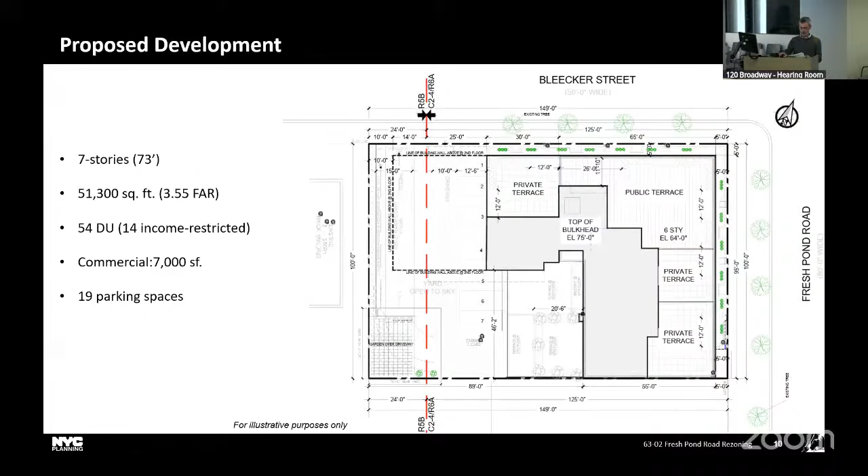The residential entrance would be situated along Bleecker Street. Multiple commercial entrances would be located along Bleecker Street and Fresh Pond Road, and the parking entrance would require a new curb cut located on Bleecker Street, while the existing curb cuts along Fresh Pond Road would be removed.

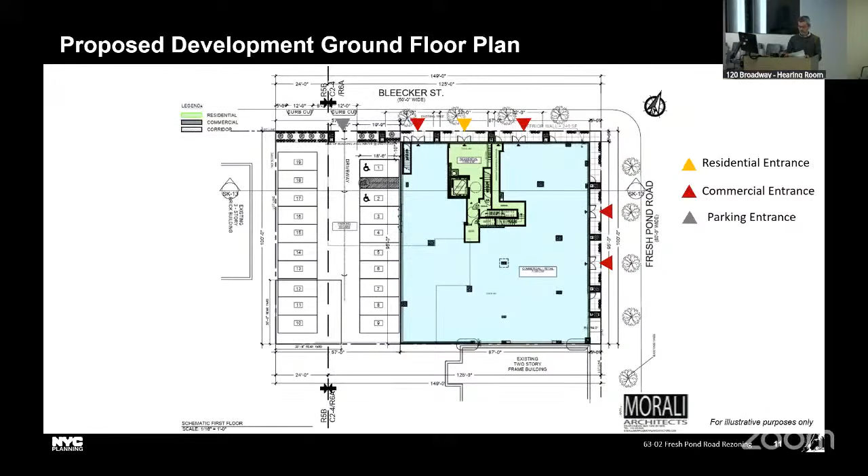So to facilitate the proposed development, the applicant proposes a zoning map amendment from existing R5B C14 zoning district to an R6A C24 zoning district, as well as a zoning text amendment to map MIH both options 1 and 2. The existing R5B C14 zoning districts have a max base height of 25 feet, max building height of 45 feet, with max residential FAR for qualified housing at 2, and a max FAR at 1 for commercial uses. R6A districts allow a max base height of 55 feet and max building height of 95 feet. The maximum residential FAR for qualified housing in R6A is 3.9, and the C24 commercial overlay allows for an FAR of up to 2.

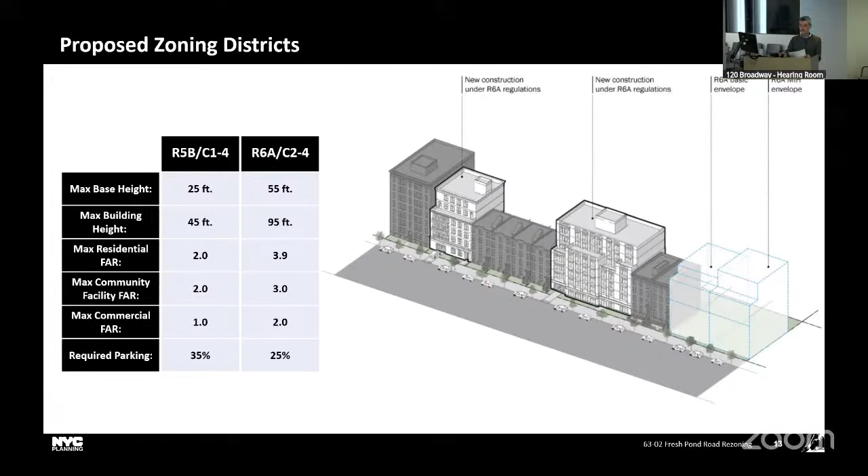MIH option 1 requires that 25% of residential floor area be income restricted at an average of 60% AMI, while option 2 requires that 30% of residential floor area be income restricted at an average of 80% AMI.

This application is also subject to the racial equity report requirement, since it seeks approval for an increase in permitted residential floor area above 50,000 square feet. During this time, the median household income in Community District 5 was approximately $88,200 annually, which is above the estimates for Queens and New York City, respectively, as a whole.

The estimated monthly rent for income-restricted units for households between 40 and 80% AMI ranges from $1,220 for a studio up to $3,370 for a 3-bedroom. The estimated average income for households earning between 40 and 80% AMI ranges from $45,400 annually for a one-person household up to $140,000 annually for a five-person household.

As you can see here, the applicant is proposing 25% of units be income restricted in line with MIH option 1.

This project area is located in the Ridgewood, Maspeth, Middle Village, and Glendale PUMA, of which approximately 11% identified as Asian non-Hispanic, 2% identified as Black non-Hispanic, 36% identified as Hispanic or Latino of any race, and 48% identified as White non-Hispanic.

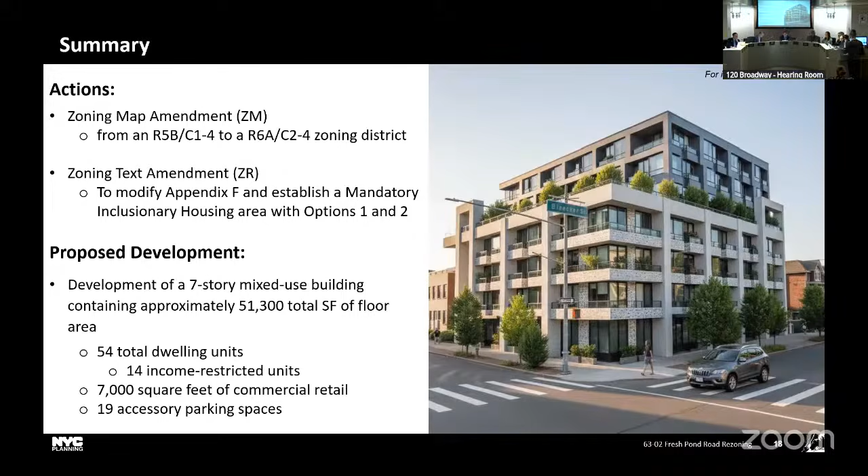And again, same comment as with the previous project. But in this one, I just want to say a word of caution in terms of the data that we see meeting all the requirements in the racial equity report, which together consolidate information for the PUMA. But here we need to see Ridgewood separate from it. Your map shows that there's a high risk of displacement, but also the median household income varies a lot, and so do the different existing rents. So I would just encourage you to take a look at that, and maybe we can discuss that when we see it later. Just that if we just stick with the race equity report, we will miss the discrepancies between Ridgewood and the other neighborhoods in the PUMA.

This is the presentation for 1160 Pugsley Avenue rezoning. It is in the Unionport neighborhood in Community District 9 of the East Bronx. The applicant is 1160-1178 Pugsley Ave LLC. It's also located in Council District 18.

And the actions requested for the commission today are a zoning map amendment and a zoning text amendment to map MIH.

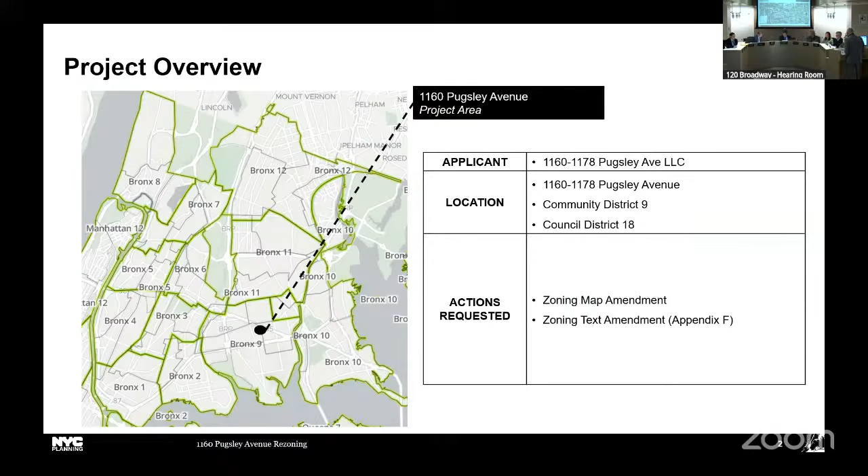The slide provides an aerial view of the surrounding area. The project site is located approximately 1 block south of the Cross Bronx Expressway. It's well served by mass transit. The Parkchester station of the 6 train is located approximately 0.3 miles away. It is also served by numerous bus routes, including the BX4 and 4A, BX36, BX39, and Q44 select bus service. Multiple express bus routes providing service to Midtown Manhattan are also located within walking distance.

Commercial activity is concentrated along the Cross Bronx Expressway South Service Road and Olmsted Avenue. Commercial uses generally consist of ground floor grocery stores, restaurants, and barbershops.

Henry Hudson Junior High School 125 is located within the surrounding area. Located just beyond the surrounding area are public schools providing instruction to pre-K through 5th grade, including the Dr. Emmett W. Bassett School, PS 36, and PS 583. Several houses of worship are situated to the west, north, and east of the project area.

Nearby public open spaces consist of Haviland Playground, a just under 1 acre playground located in the southwest corner of the surrounding area, and Chief Dennis L. Devlin Park, an approximately half-acre triangle plaza adjoining the Cross Bronx Expressway North Service Road located in the northeast corner of the surrounding area.

Zooming in, the project is located on the block end of Pugsley Avenue, which is a wide street between Gleason and Powell Avenues. The surrounding area is generally characterized by a mix of low-rise 1- and 2-family residential buildings, multi-family residential walk-up buildings, and a portion of the Cross Bronx Expressway and service roads on the north and south sides of the Cross Bronx Expressway.

Taller 5- and 6-story multi-family residential buildings and mixed residential and commercial buildings are located immediately southwest and north of the project area. Just beyond the surrounding area, to the south and northwest of the project area, are taller 8-, 15-, and 14-story multi-family residential buildings.